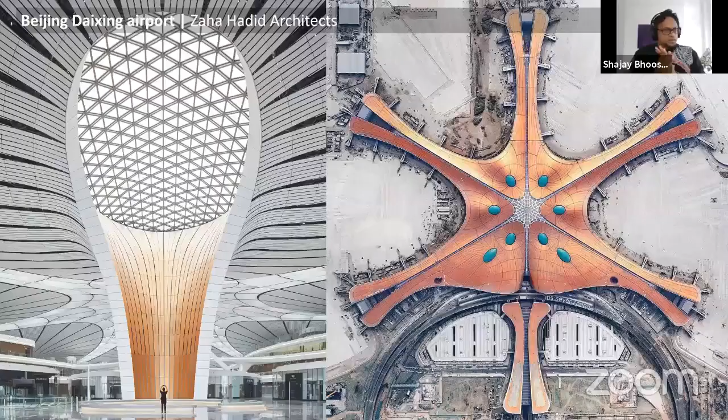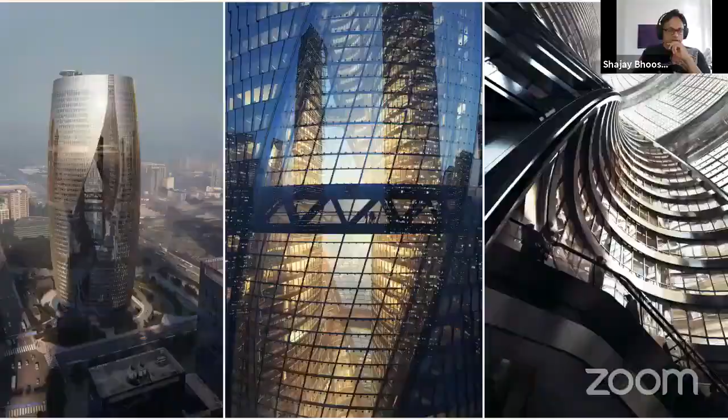So myself and my team feel quite fortunate to work in a global company with talent from all over the world, I think 60 different countries, spread between Asia to Latin America. We feel fortunate also that our colleagues and peers and seniors, preceding generations, are manifesting these amazing buildings, including these two that got completed last year: the Beijing airport and the Leeza Soho tower with the largest atrium.

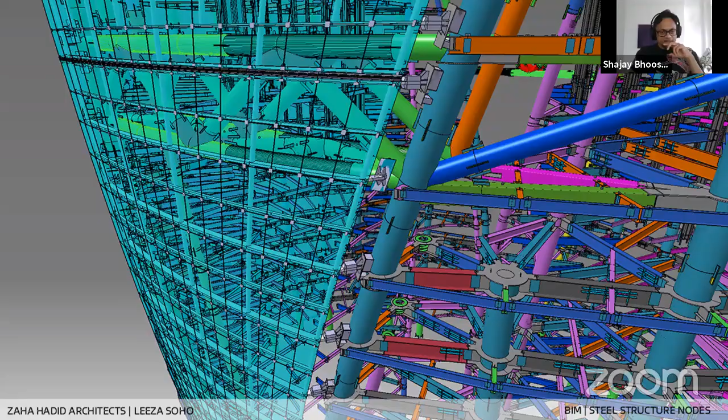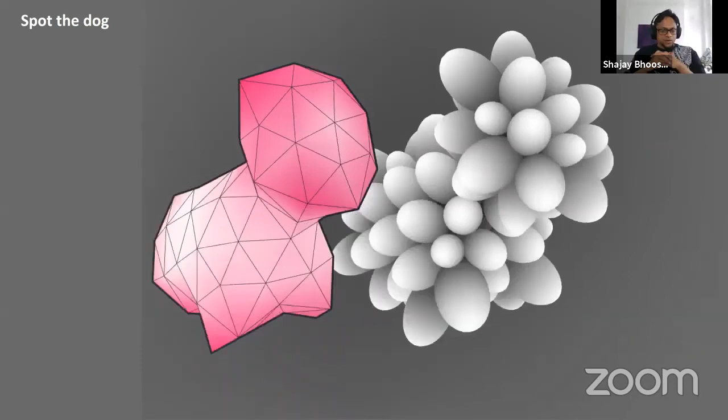And so we're also fortunate to witness not only the physical manifestation of this, but also the genesis of it, and also all the sweat and detailing that goes into these buildings. And lastly, that allows us as a team to focus on a little bit further ahead, the near imminent future, and how we can shape that with new technologies. So we get to play in a serious way because our peers and colleagues are really at the bleeding edge of architecture, a very enthusiastic and motivated group of people.

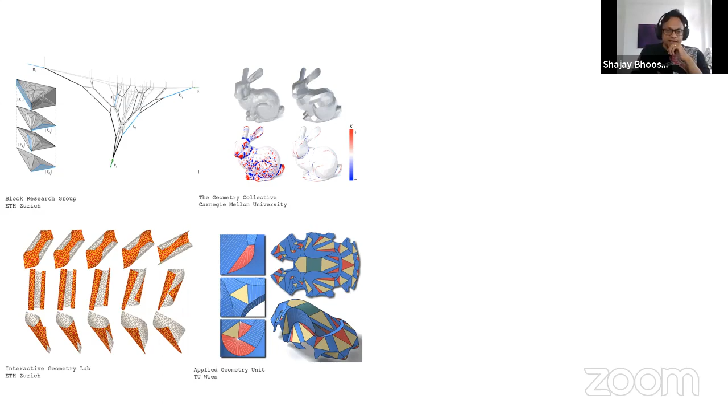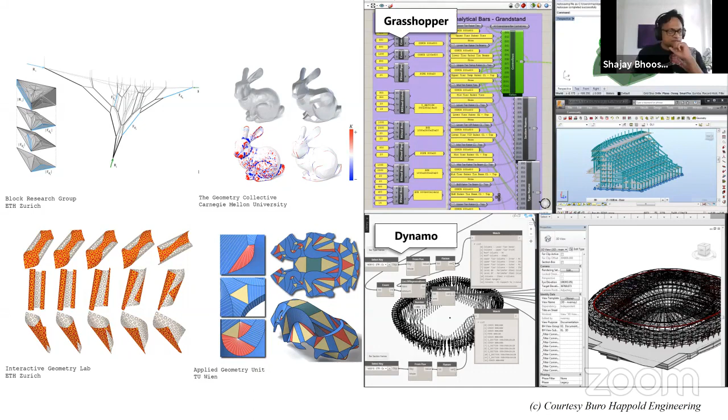So we as a team tend to research these geometric, so-called computer-aided geometric design technologies, CAGD technologies, and its relationship to more mainstream BIM practices. We've been doing this for the last 15 years or so, and now a lot of this is becoming available in a more mainstream way, and we feel very enthused by these recent developments, both by the Block Research Group on the one hand, bringing bleeding edge research to make it available to a much larger, wider audience, and also practice-based BIM experience from Buro Happold Engineering.

They're making it available through these computational frameworks, so very exciting time to be in practice in London. That's why I felt that we are in a position to talk about the real promise of digital design and robotic construction as it is maturing very, very rapidly, which is citizen-centric cities, or a citizen-centric built environment in some ways, for human betterment and through effective resource utilization.

This, I believe, is the real promise of digital design and robotic and advanced manufacturing. The talk will briefly situate architectural design and urbanism of such cities, the social and physical technological layers that might need to interact, and also a first real-world attempt that we recently tried to launch.

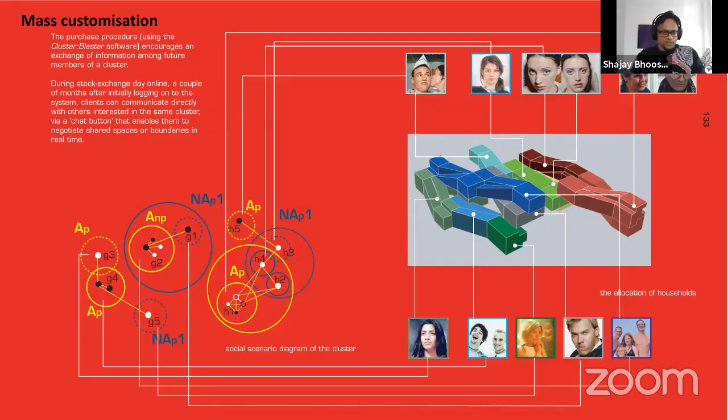And subsequently use digital construction to produce mass customized housing. So since 2015, my partner and myself have tried to pick up this thread in view of the rapidly maturing digital design and also social technologies, and also constructional technologies of robotic manufacturing and DFMA, or design for manufacturing and assembly, and so on.

Over the last 5 years, we have tried to anticipate, through graduate researchers and our own effort and collaborative efforts, to research this idea across many core topics. For example, the first main topic has been about how to spatially organize communities.

Can the communal synergies be physically manifested, particularly in kind of live-work communities, which were quite common in London before the war - ideas like a top shop, or live-work ironmongery, or bakery and so on. So can we have something like that?

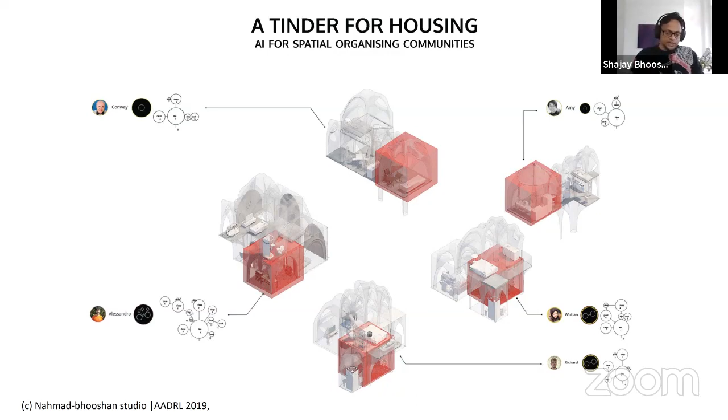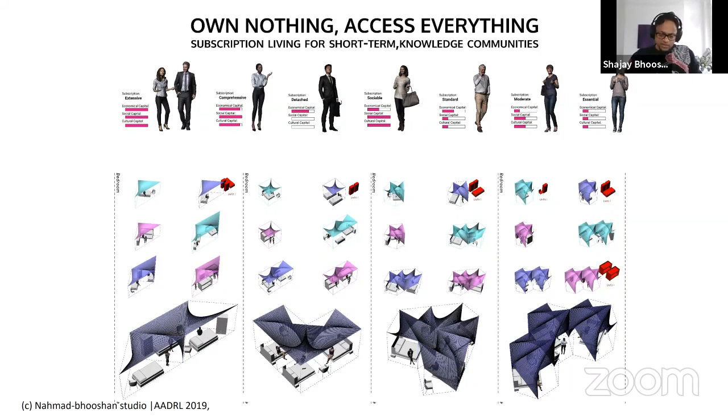Was one of the topics of exploration, and that was for long-term communities. We also explored similar things but for short-term communities, like a lot of students and young professionals that come in and leave London at an average tenure of 2 to 3 years maximum. So how can we address that?

Another topic that began to emerge is the idea of gamification of these - how we can leverage game technologies, but also game theoretic mechanisms to arrive at negotiated solutions between sharing and resource pooling and so on.

And across all of these efforts, the main idea is to challenge the 100-year stranglehold of this architectural diagram of the Maison Domino, and its pairing with a technological equivalent of the Hennebique patents and reinforced concrete construction, and so on.

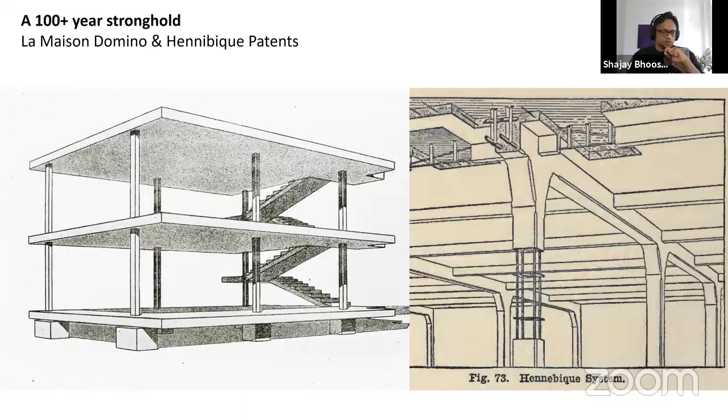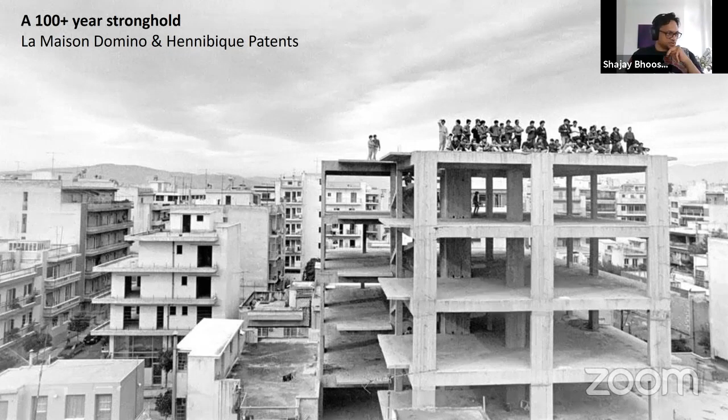So how can we revisit this in the 21st century, because it was enormously successful, but also it left quite something to be desired in the effect it had. So to take on the positives whilst avoiding the negatives, let's say.

So we try to revisit across all of these efforts the idea of the Maison Domino, and how we can construct a new tectonism for residential or domestic architecture in view of emerging technologies.

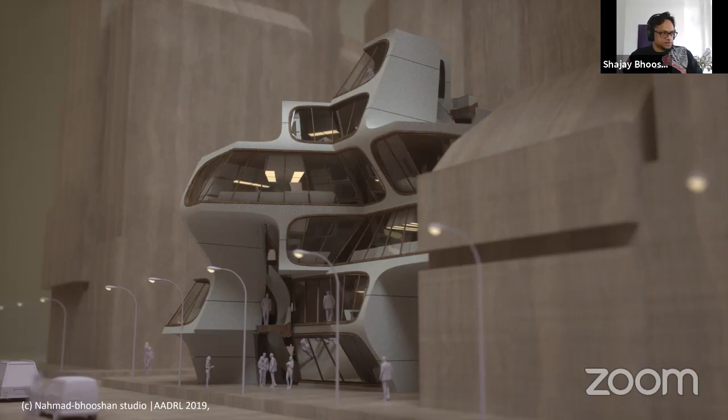Since last year, with the relative success we've had over the last 5 years—which I'll speak about more towards the end, the real world instantiation of some of these ideas—we now feel it's time to start thinking about participatory cities. And that's what we are doing now.

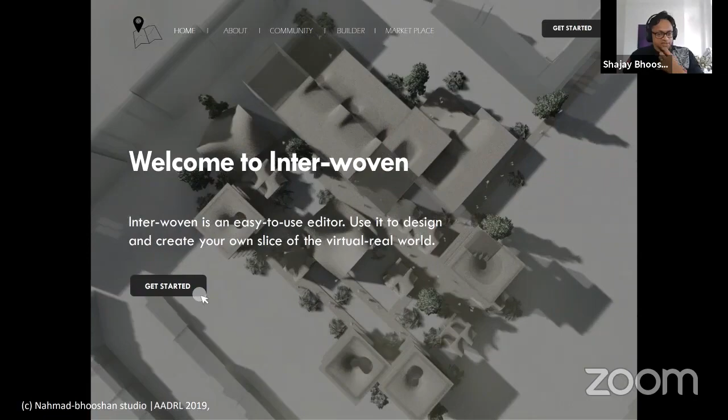Just to give you a glimpse of fresh work from the DRL from this year: the idea is to create platforms, leveraging digital web technologies, but also real-time technologies of interaction, pairing virtual and real worlds in some sense through an architectural technology layer.

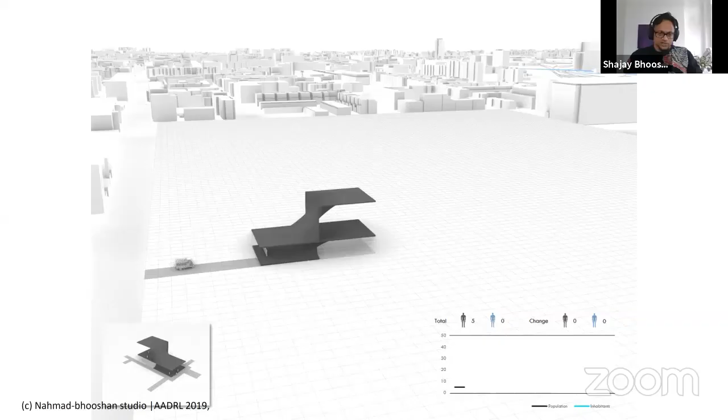The idea is to have a space of experimentation, speculation, forecasting and predicting what might be, through gameplay mechanisms or role playing and so on, so we can keep track of motivations. It's more a speculative idea to figure out what might happen if you revisited urban development from first principles.

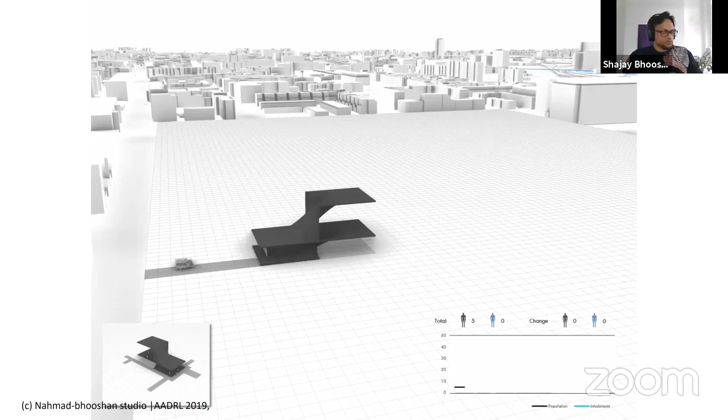So in that sense, we see participatory cities as composed of two main layers: the base physical substrate of industrialized construction, and the social technological layer of governance technologies.

What do we mean by governance technologies? When it comes to governance of the built environment, it usually relates to taxes and policies of real estate, zoning laws, infrastructure development plans, transport requirements, parking laws, and all these various laws and their governance, which usually multiply and proliferate quite rapidly.

The idea is to see: can we introduce a technological layer for governance by first principle? What are the first principles of governance of all these policies? We have to effectively allocate resources, and we have to take speedy decisions such that we deliver services to inhabitants.

So what are the challenges of such technologies? First, it has to be a low risk environment, because we cannot make expensive mistakes on the built environment. There also needs to be fluid interchange between experts—planners, architects, constructors—and at the same time there are many stakeholders, like citizens, who are affected by these decisions. So how can these two interact? How can we provide agency to non-experts who are affected by expert decisions?

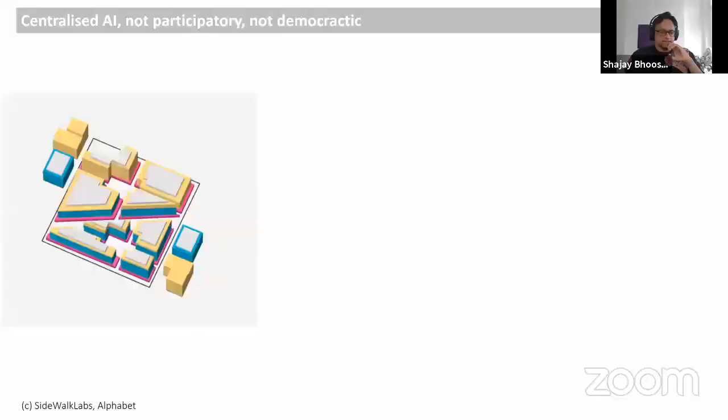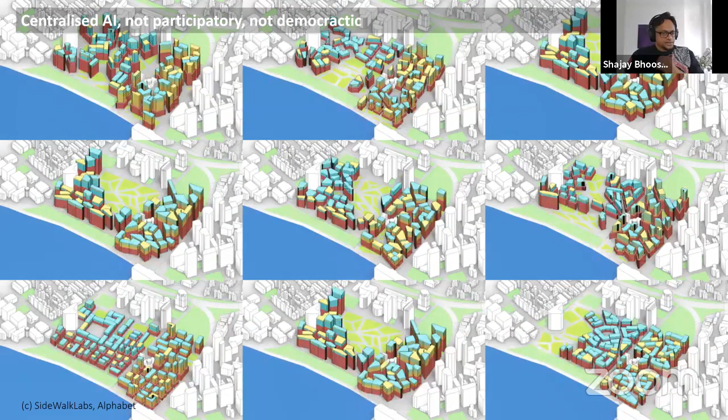Even though Sidewalk Labs and Google are talking about the right things—trade-offs and participation—their design systems are entirely centralized. They're not participatory, not democratic. It's a centralized expert system that goes through millions of options and is then executed in one go, so it's not as transparent as it could be.

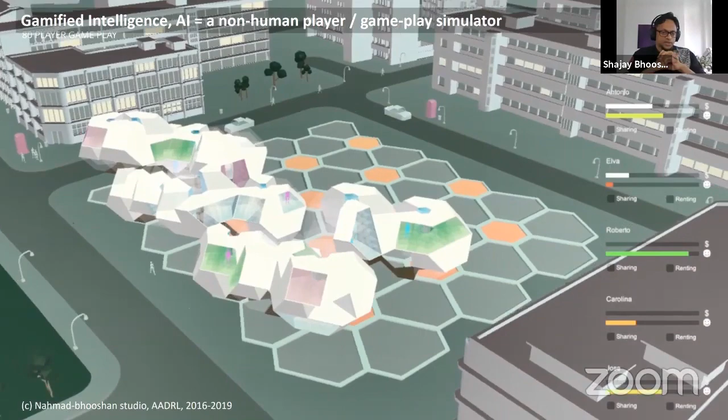Contrast that with where we're coming from: we can definitely leverage and use AI systems, but they're just a non-human player within a game, or they can be used to simulate human gameplay and forecast scenarios of the social layer and the interaction layer.

Here we're simulating players trying to rent and share spaces as they go, sharing resources and transacting with each other in a kind of small economy. We keep track in this simulated gameplay of how many transactions happen between inhabitants—the black represents transactions with the community as a whole—and you can see across various time instances that changes, sometimes the community has to invest more, sometimes less. It's a kind of equivalent of a voluntary tax.

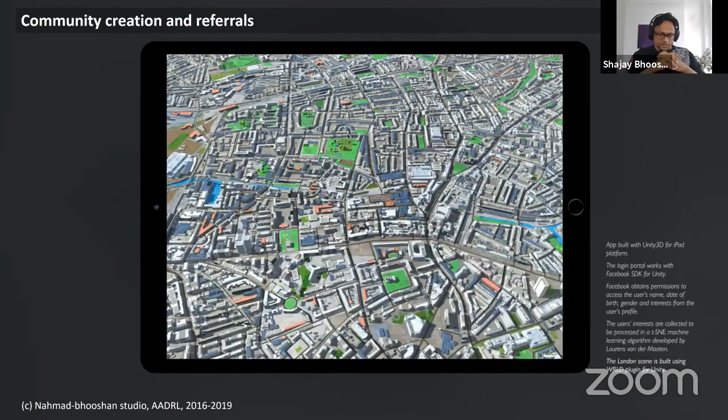That's one side where we think game technologies are very useful to explore. The other is the social layer inbuilt to a lot of these game technologies—like hooking it up to a Facebook community and using Facebook for real, doing good stuff rather than just whiling away your time. Facebook also has a lot of AR technologies built in.

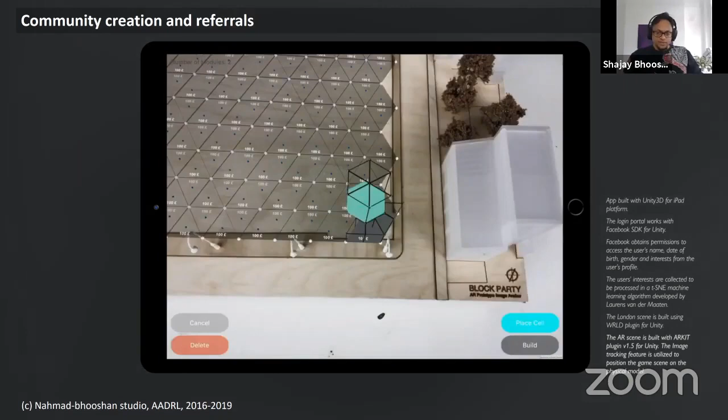We could leverage that—this is a simple AR app we built where people can choose various things they want, like a playground, little bedrooms, and so on. It's a kind of simultaneous gameplay between multiple people.

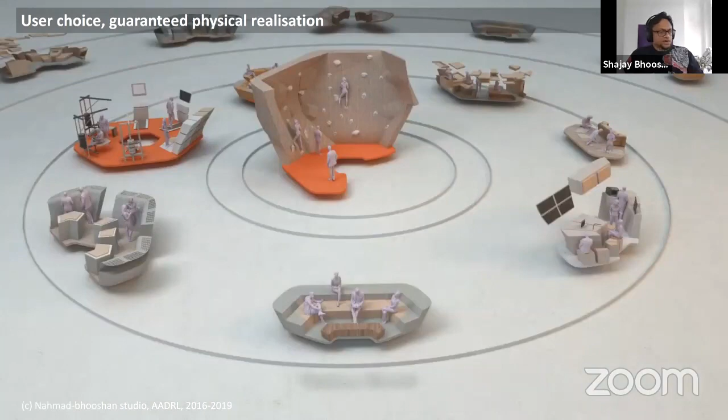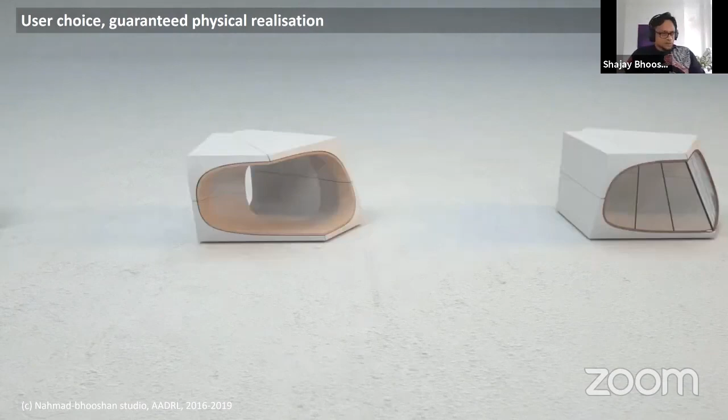We can also go entirely blue sky with this, where we can speculate on how to design for all of this choice, so that it's not just like a car where the choice is related to the color or type of seat, but we can have spatial choices ranging from what kind of things people want, like rock climbing to gyms, while at all times these things are physically guaranteed to be viable. So it's a very highly curated design space.

With enough variety to offer various inhabitants. So that's what we mean by governance technologies, like looking at self-formation, self-guided, community-forming, cooperative types of residential developments, and how that can be further extended to cities.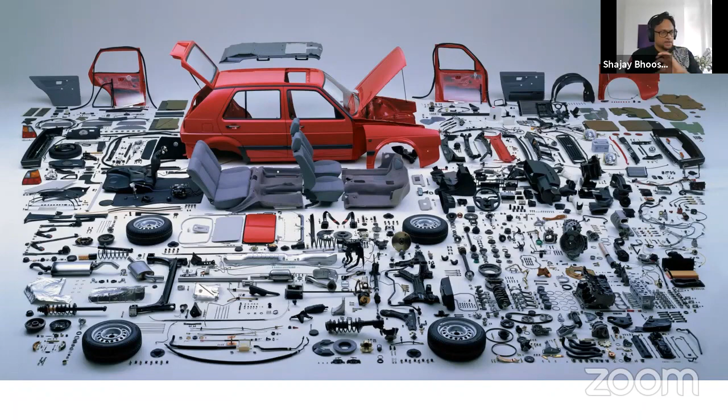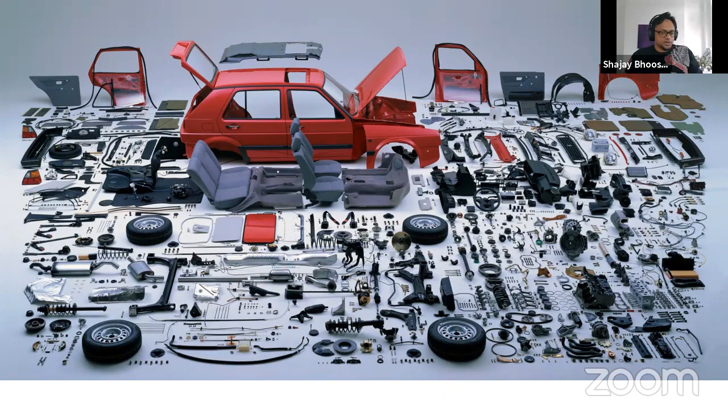Same population, but an order of magnitude more environmental impact. So whilst there is a ready understanding of the benefits of thinking about buildings and cities like cars and efficient manufacturing, kit of parts and so on, when this has been tried in architecture before, this is the Lustron house. It leaves something to be desired in terms of its mass reproducibility.

So we don't want all houses to be exactly alike. There is a social layer missing in all of this, which is what we are trying to address. So whilst we want to take on the economies of scale of manufacture-and-assemble type industrialized construction, we also want to reconnect and upgrade traditional wisdoms, because there's a lot of intelligence embedded in the way things have evolved in the built environment.

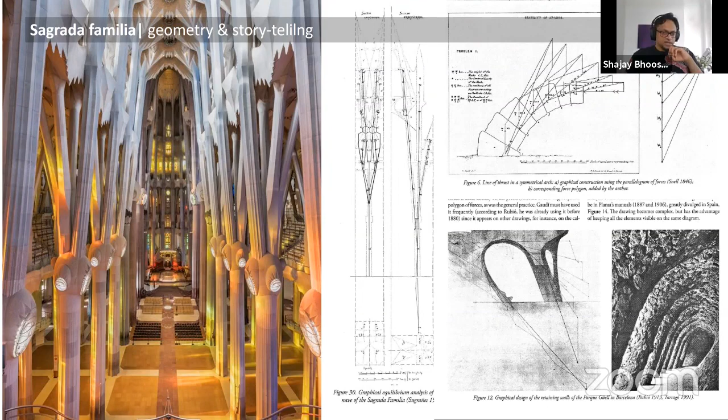So for example, we want to reconnect with some of the technologies and thinking, particularly geometry-based thinking, of people from the 18th and 19th century, or even before that from the Gothic and Renaissance times - these kinds of graphical, geometric means of designing structure. And not only that, all these geometry-based manuals of construction meant you didn't need to be a mathematician or a geometer to be able to construct these.

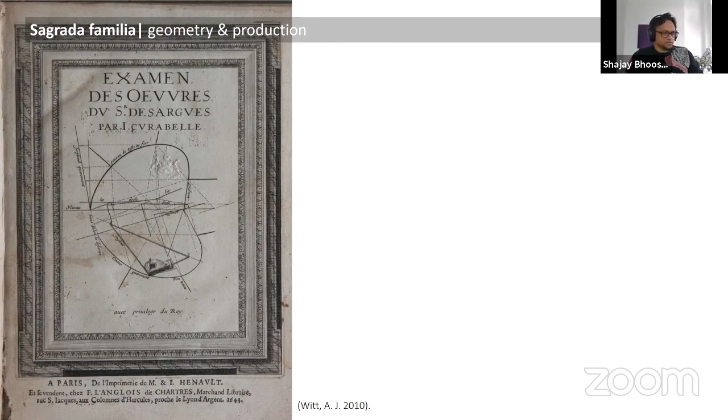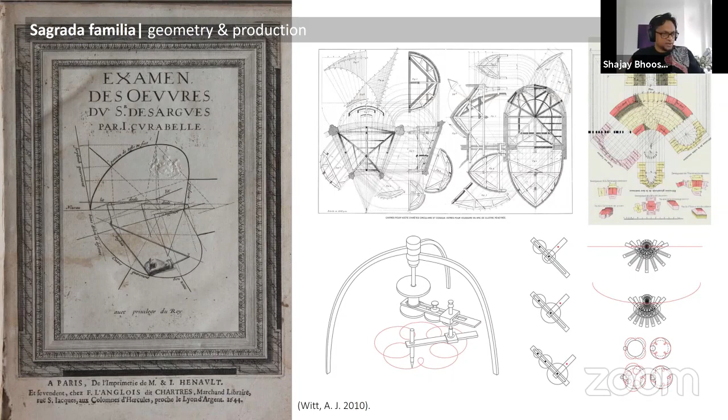So geometry was the base language through which construction was encoded, and it was encoded in these machines, these instruments, in the way to draw construction drawings and even construction instructions. We want to reconnect with that kind of thinking. This is also, in a way, industrialized construction, where there's an ecosystem of knowledge workers - this is pre-computer time, but we see these as very relevant predecessors to the kind of effort we want to do.

So this is where we see a significant role for architectural geometry. By architectural geometry, we mean structure- and construction-aware shapes. I'll try to give you a few examples of that.

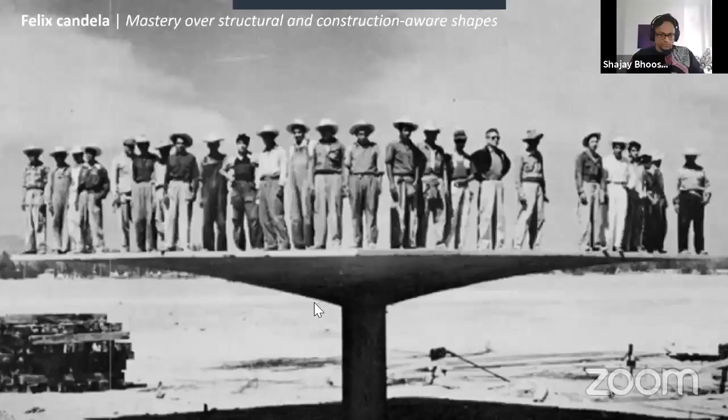This is in the context of Felix Candela, who was really one of the early masters of such geometry - structure- and construction-aware shapes. You can see how thin some of these structures are for the weight they can carry, and how highly performative the shapes are.

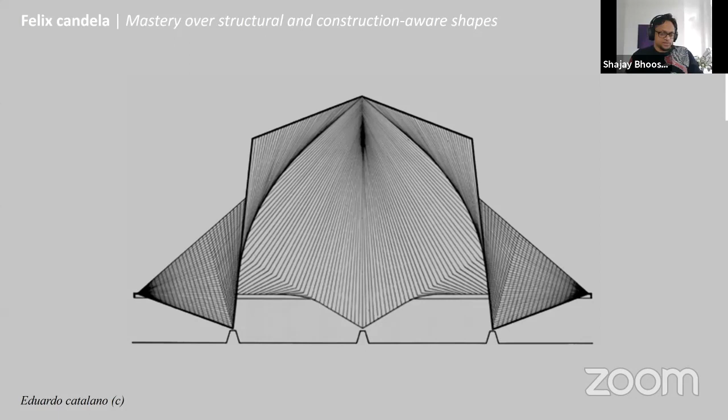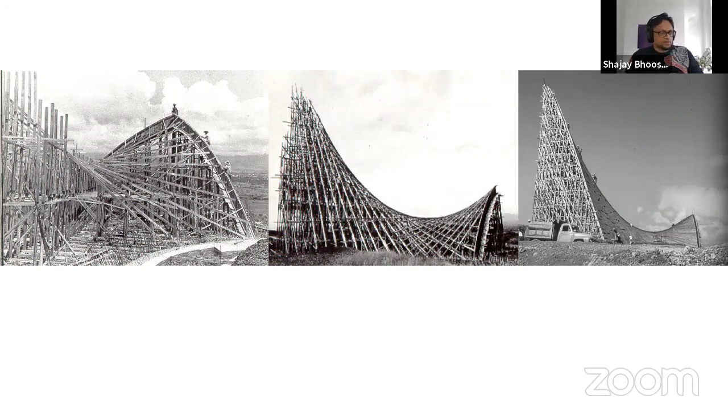It also had the additional benefit that they could be constructed using simple straight lines, so you could create doubly curved geometries with simple ruled or straight-line formwork. This is one of the early examples of what we mean by structure- and construction-aware shapes. But of course this came at a price, because you were making the formwork twice - basically making the shape twice, since you had to get rid of the formwork after it was made.

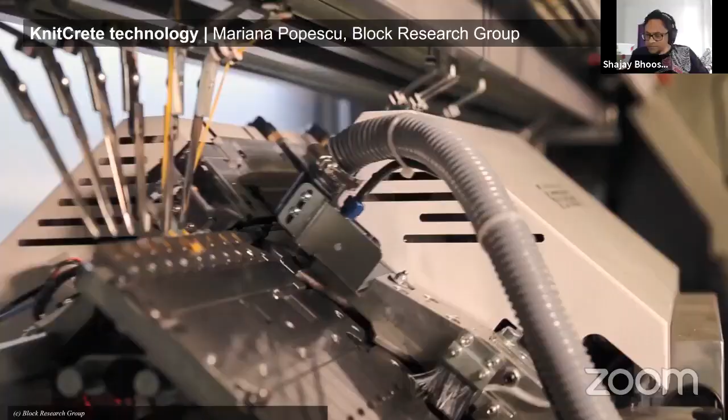The entire formwork was made on a kind of grandma knitting machine in Zurich, packed up and taken on a commercial airplane in a suitcase. It weighs about 55 kilos, and was designed and engineered by the Block Research Group as part of Mariana's PhD research.

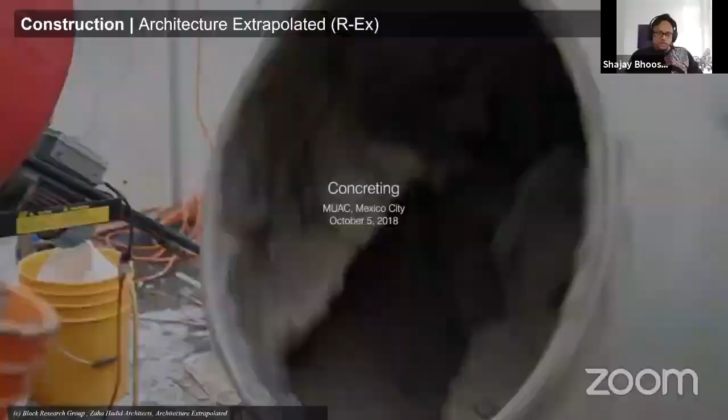We made minimal formwork, guide work on the side, then pulled up the fabric and tensioned it. Architecture extrapolated and coordinated all the construction workers, and the extremely skilled Mexican labor in terms of casting concrete against gravity, against highly curved shapes, which is not easy.

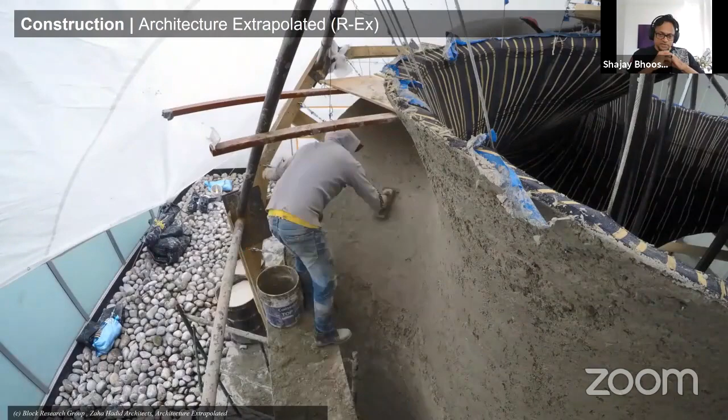Shajay, may I interrupt you just a second? When you talk, the video sound is too loud, we cannot hear you. Okay, thank you. You mean the sound of the music? Okay, I don't have any more music in it.

So it's similar, we've tried to expand on these ideas previously. Everything you see here, the shaping of it, is related to how it performs structurally and how to construct it.

For example, all these lines on the fabric are related to lines of equal tension, so there is no wrinkling. These are not arbitrarily drawn lines—they're drawn specifically to minimize the amount of wrinkling when you stretch the fabric.

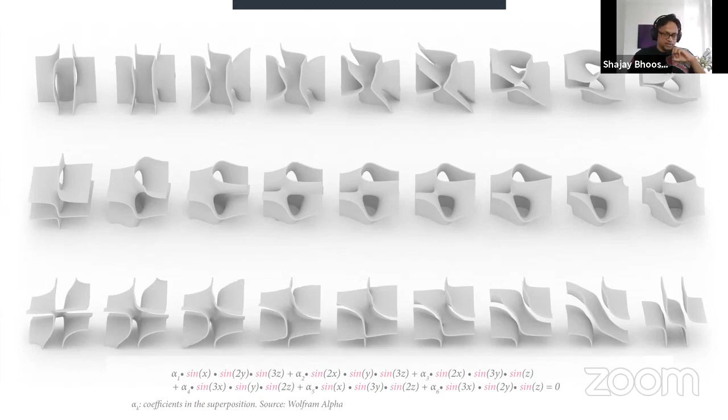These kinds of shapes allowed us to create many little shapes within a small gallery of 1,000 square meters. There were 25 different stories told in that small gallery because of the added freedom that curvature and these complex shapes allowed us to utilize.

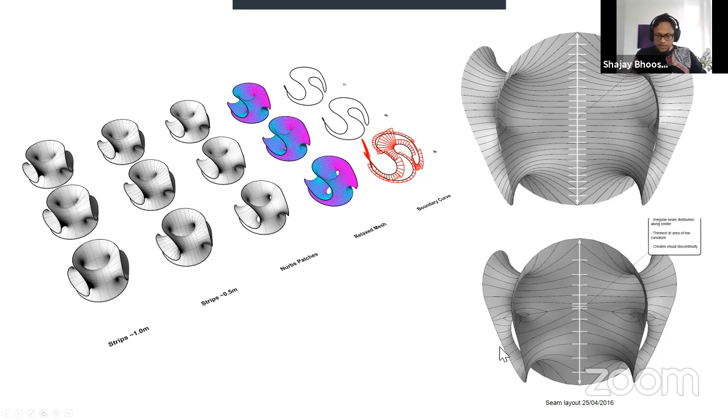So this is part of the constructional aspects—for example, the tailor wanted to stitch it in this way at the bottom right, and we wanted it stitched at the top right. In the end, what was constructed was some hybrid between what we wanted as a design team and what the tailoring team could achieve.

The other benefit is that the same technology and thinking can be used whether it's a gallery for mathematics in the heart of London or a school for refugee children. This was designed to go from prototyping to installation within 2 months, so it arrives on site and you just open it up like an umbrella.

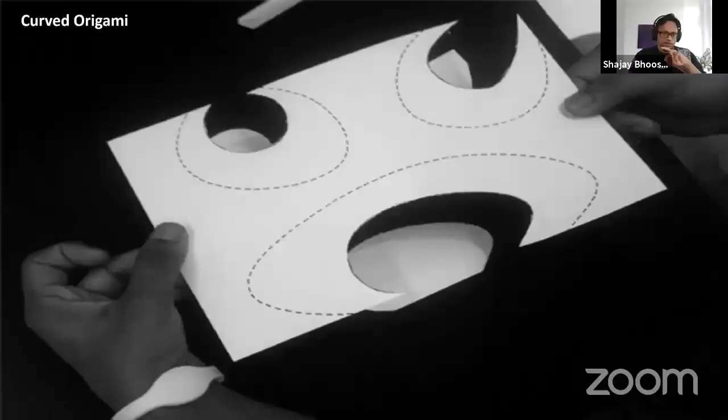Here's another example of what we mean by architectural geometry, or construction and structure aware shapes—this is related to curved origami. Curved origami is very, very simple: physically speaking, you cut away paper and score paper, then fold, and you get curvature for free.

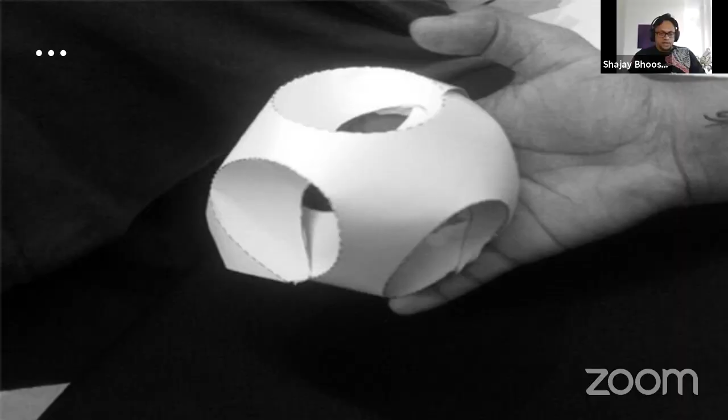This curvature is obviously structurally beneficial, and it's also beneficial in the range of parametric variations you can create in very intuitive ways, and also create very complex performative geometries in very simple ways.

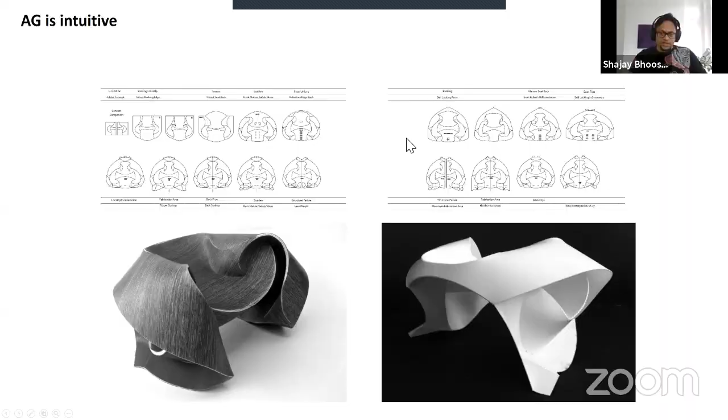Both these shapes come from a single piece of paper, a single piece of plastic, with these scores, and you can fold, and you can literally scale these things up from small to large.

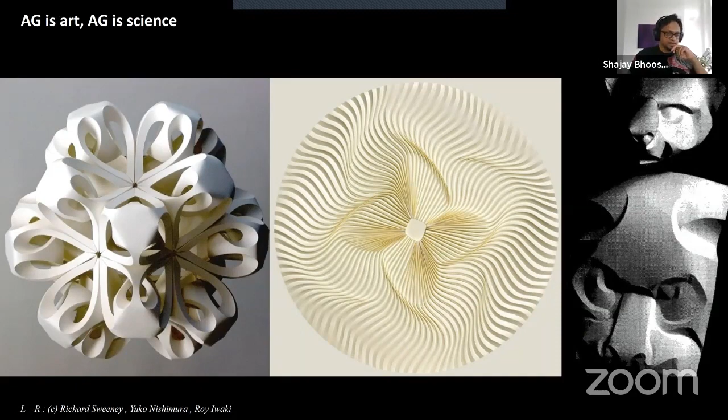It also has a predominant history all the way to Japanese manuals in the 10th century, to contemporary art and science. For example, David Huffman and Ron Resch in the 1970s picked this up and tried to make it computer design friendly, looking at the mathematics and computer generation of it. Subsequently it's also been studied extensively by Tomohiro Tachi in Tokyo and others.

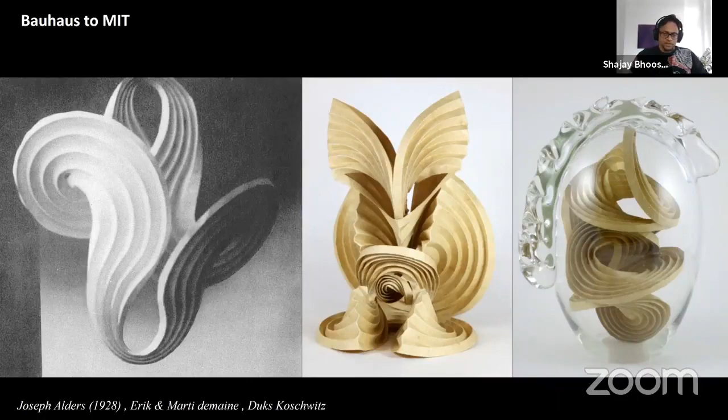Incidentally, this was taught in the Bauhaus in the 1920s as part of the curricula for architects. We're trying to pick that up and augment it with digital tools to allow us to make these kinds of curved geometries. This was made in India in 2012 with just a laser cutter.

You score and fold by hand, and within a few hours you get complex geometry which is structurally beneficial. It's also materially effective because everything comes from flat sheet material.

Similar ideas applied to our effort in the Venice Biennale, where all of the intelligence is mainly in the geometric ways of arranging material. This piece is 6 meters tall and made of 1.5 millimeter thick aluminum.

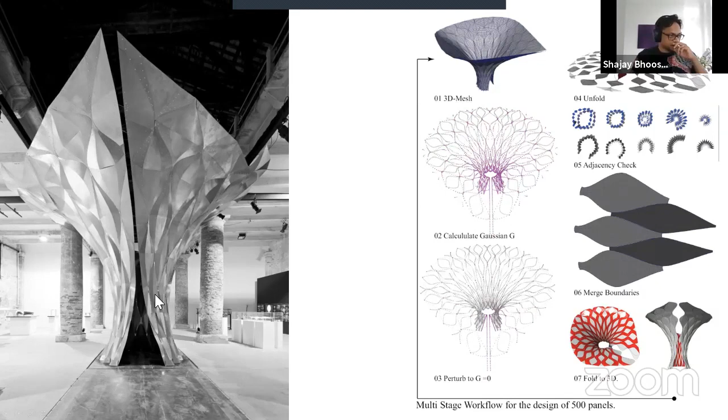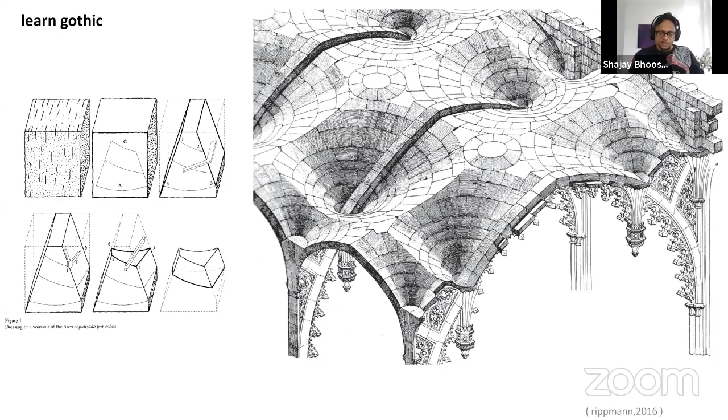It's self-supporting mostly because of the curvature and the folded plate action. Another example, the last one, is these benches we made in the Science Museum, which looks at historic techniques of describing geometry for stone cutting, the discipline of stereotomy, and then revisits that.

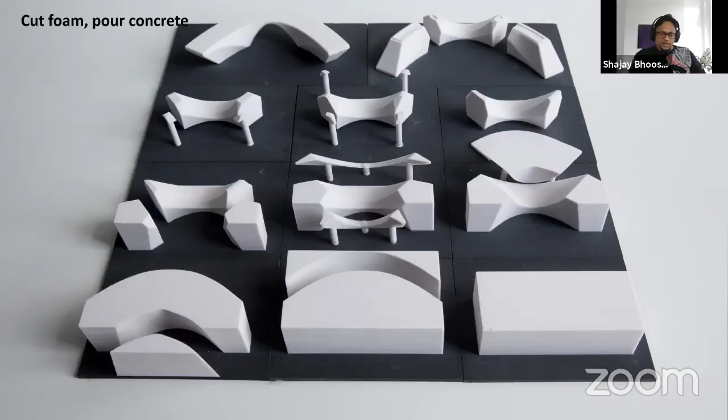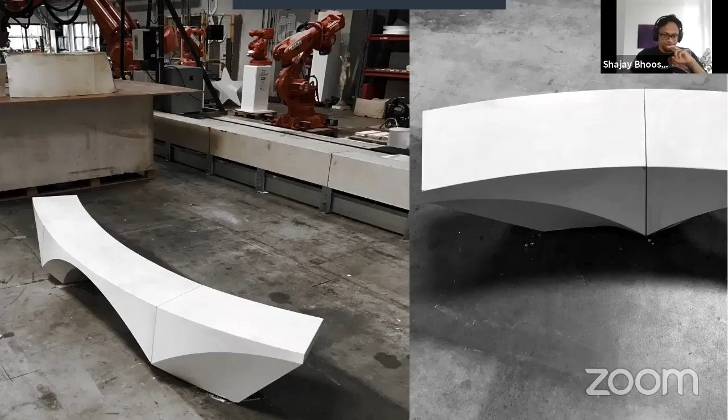In the context of robotic hot wire cutting, you can go from a full block of foam to the formwork in about three and a half minutes. There were 16 different benches, all delivered on time and on budget. The quality of the finish naturally reflects the way the form was cut, so how it was designed reflects these smooth finishes.

So that's what we mean by architectural geometry. What features does it share with modernism? It has common ground in that it follows the trajectory of teaching, learning, and doing. Like modernism, like the Maison Domino, it is aware of the technologies of engineering and construction, and there's a new flexible diagram to design with these kinds of shapes and new technologies.

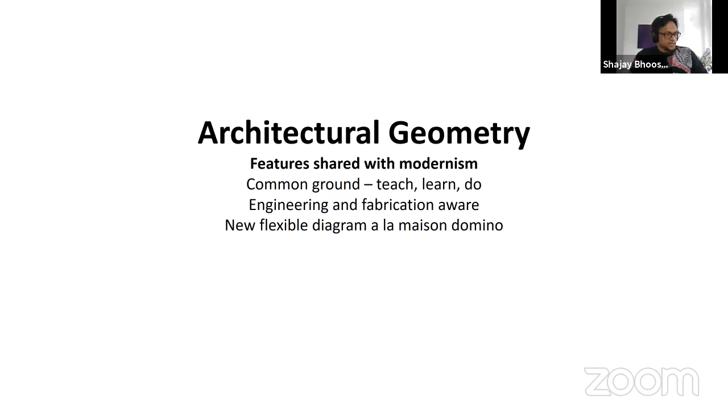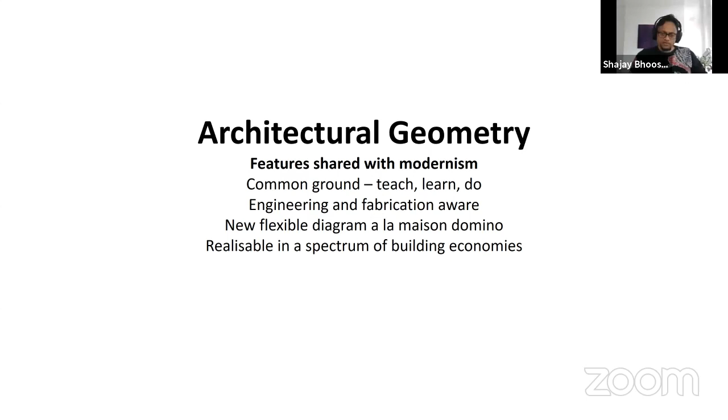It's also realizable in a spectrum of building economies, from India and China to Latin America where we have worked, and everywhere in between. What's different is that it has far more degrees of freedom.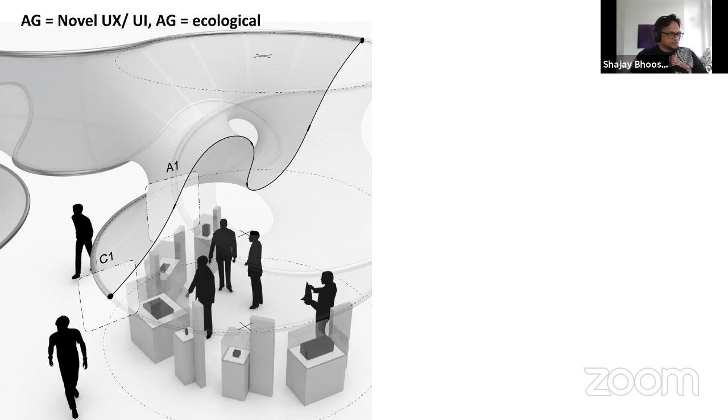This allows, in a very small space, the telling of many different spatial stories. For example, here we were housing a very somber artifact related to eugenics alongside more playful ones, all within a small space without needing special rooms. High curvature offers high degrees of freedom to articulate spatial variance and user experiences.

Curvature is also beneficial ecologically, since you can use very weak material, like in this case by Block Research Group, using raw earth in a good structural shape. You can span with very weak material, meaning very little embedded energy goes into it, since much of the strength of materials comes from pumping energy into the material.

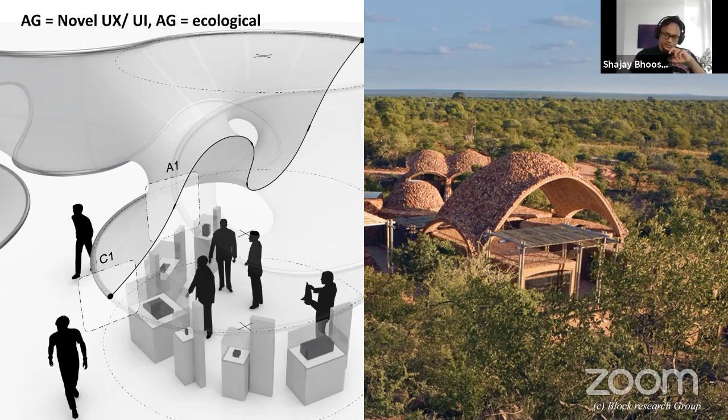This is the same principle now being used to produce floor slabs that are 70% lighter and save 25% of space, all because of a bit of curvature and the ribbing on top.

So much so that recently the BBC picked up on these ideas of sustainability, using appropriate structural shapes to save material, save energy, and achieve longevity in construction. That's what we mean by industrialized construction: factory-made manufacture and assembly, but also reconnecting with the past and its wisdoms.

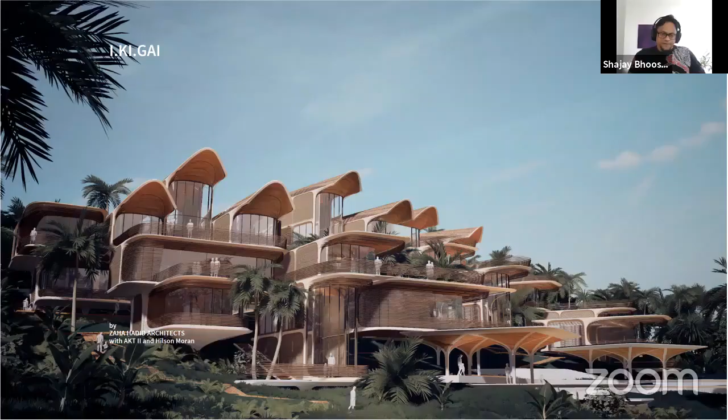I'll end with a real-world example where we're trying to bring these two things close together: a small island off the coast of mainland Honduras, where we're trying to make housing integrated into the landscape. It's an effort between Zaha Hadid Architects, AKT II engineers, and Hilson Moran environmental engineers.

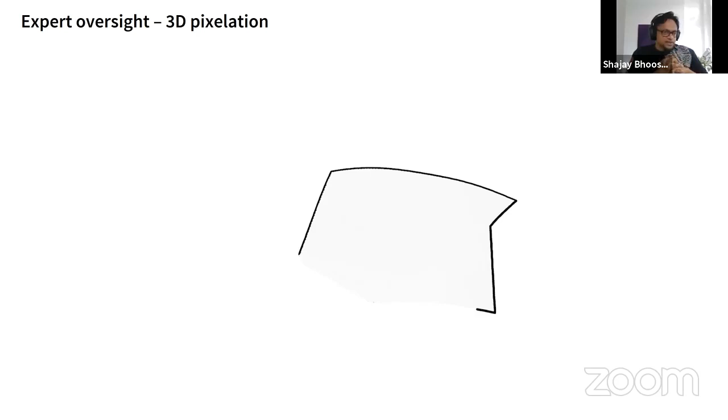Honduras has a lot of locally certified timber. What we're trying to build here offers choices and allows people to form communities, or at least shape their own, embedding their own choices and interactions with other people.

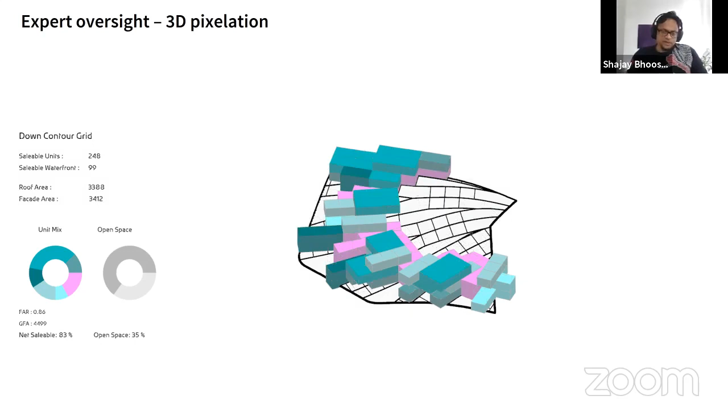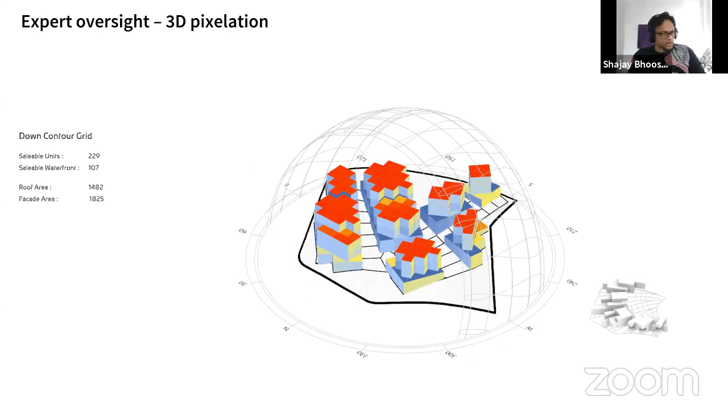As architects and engineers, we first lay out pixel grids according to global parameters like views and solar gain. Then users can pick among those 3D pixels, choosing whether they want expansion rights, occupation rights, view rights, and so on, and negotiate this with their neighbors.

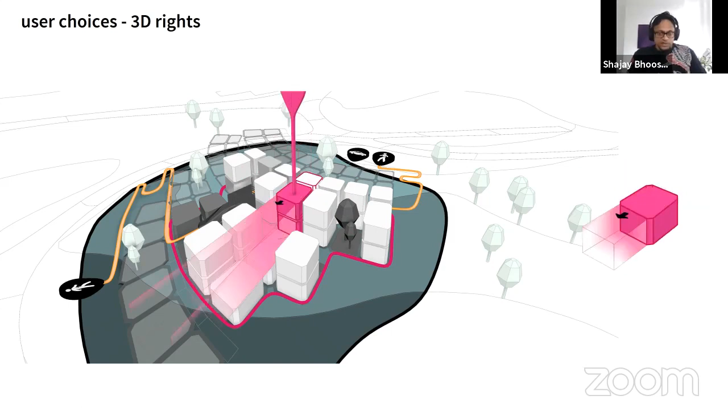And subsequently, they can also choose their own internal layouts, whether they want the living room facing the ocean, or they want their bedrooms elsewhere. Just to give a sense of the amount of choice designers have to design for, picking 3 pixels out of a grid of 9 already shows how these choices can multiply. In this first attempt we're restricting the choice to a highly curated set, but hopefully in the future we can expand to more choice.

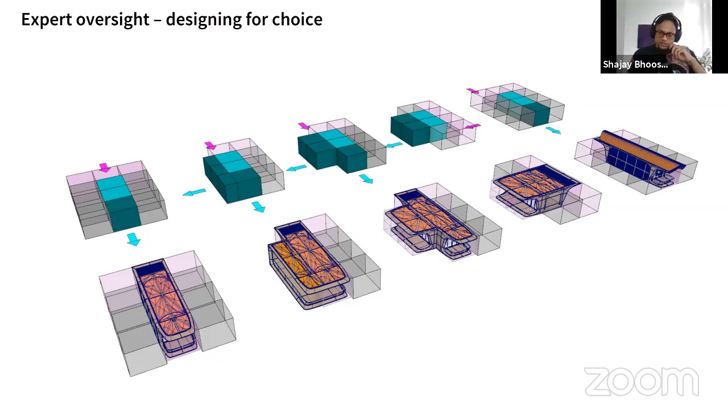The other effort we're trying to do is to import machines, not import the entire house. We want to import the machines and use local material, bringing the benefits of digital fabrication to low investment, early startup type communities, and synergetically work with the highly skilled human labor available, carpenters, masons, and so on. We augment that skill with lightweight machinery and low capital investment machinery, like things that can come in a shipping container, so it can build things much bigger than the machines alone, together with the humans.

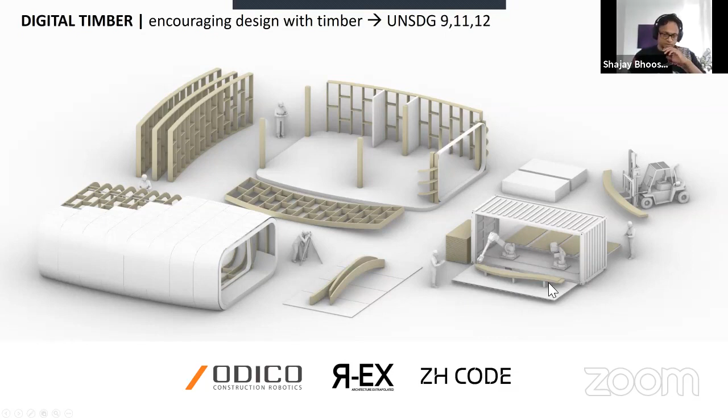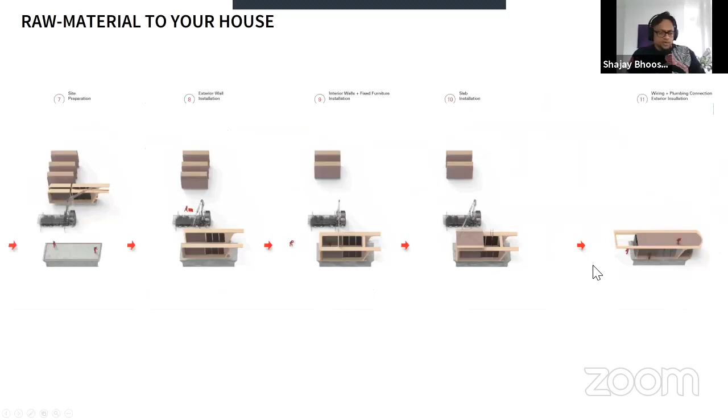That also allows us to revisit the supply chain, like how we can turn raw material into the house, and where we can innovate along this chain before raw material becomes a house. So that's where we are.

To conclude, what we mean by citizen-centric cities is a kind of digitally enabled marketplace, interaction between people with investors, like the state, private investors, partnerships or joint ventures, producers like architects, engineers, contractors, and the eventual consumers, which are the end buyers or occupants, the inhabitants, and so on.

Regardless of who these main stakeholders are, we believe the gamified aspect of resource allocation and decision making is an important criteria, so that we don't have to make very many rules. We just set as few rules as possible and allow for negotiated solutions to take place, to improve the agency of the inhabitants in the decision making process, to allow them to participate.

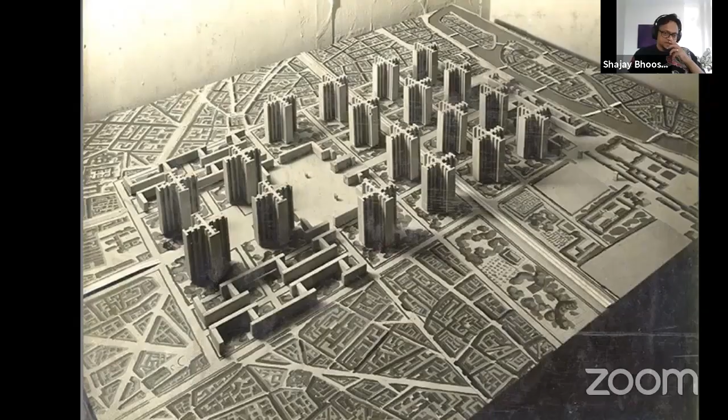Some of this led to highly impressive, aspirational showcase buildings perhaps, and also a lot of this made its way into the housing of the time, perhaps where modernism did not succeed as much at the city scale. It left something to be desired, and that's where we want to succeed, where modernism didn't.

And we think the path to success is to use participatory platforms to solve the problems of the 21st century. Platforms that allow choice and negotiation, and also using design and construction technologies that connect with the past, upgraded using digital technologies, and allow architects to tell stories whilst physically performing well.